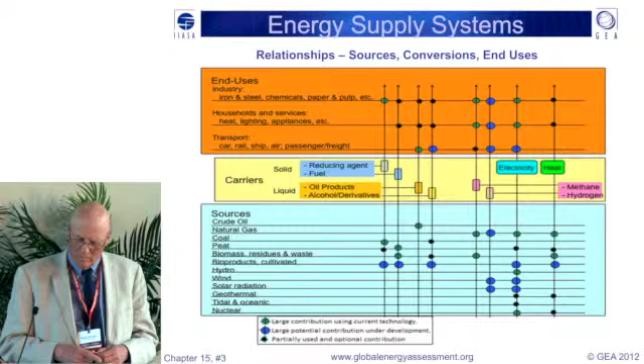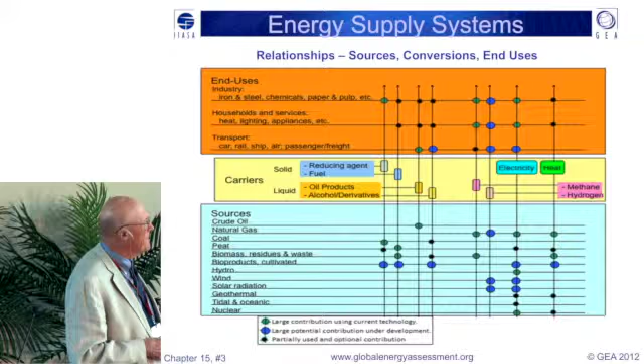Energy supply systems really are very complex, and this is an oversimplification. I don't expect that you will be able to read anything, let alone everything. But basically, we go from various energy sources down here up through energy carriers. In some cases, the source is the carrier, for example natural gas, and up to a whole bunch of end uses. In the report, we've tried to indicate which ones are important and becoming more important, and which ones are not important now but might become very important in the future.

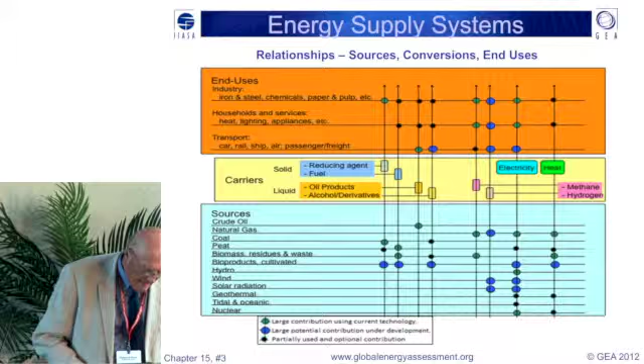Now, now I'm going to be timed. There we go.

So in terms of future energy systems, the report talks about providing, and we heard a lot this morning about providing affordable energy services to everyone by 2050. Naki had several slides that said 2030, and you forced me, Naki, to go back and look, and I did find 2050 in the report, but it doesn't matter. At some point in the next 20 or 30 years, 40 years, the goal is to provide energy services to all.

Now, I put the next bullet down because that tends to lead many people—I think we're all past that—to gravitate toward rural areas where people don't have access to energy. But I put down cities are the key, because if you think about it, so many things are happening in urban areas, and the affordable part applies to urban areas as well as rural areas. The point I want to make, or we want to make in the chapter, is that anything that's done to deal with the problems in cities will benefit people in rural areas.

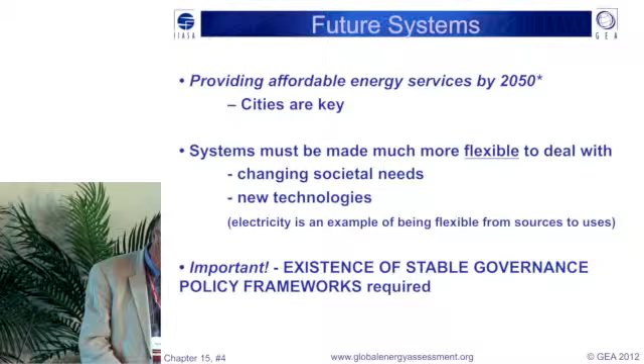Arnulf, a little bit later, is going to talk about urban energy systems, so I will not go into it any more deeply other than to leave you with a couple of numbers that tend to get lost. Over the next 20 or so years, we can expect in the world to see something like 10 cities of 7 million people, new ones, every year. Usually when you read this or when I talk to people, their eyes glaze over because they begin to think of that many cities over the 20-year time frame, but it's every year.

So cities are, I want to amplify on what Arnulf will say, cities are terribly important, particularly in terms of energy systems. That's what I want to talk about here, because that's where we can probably do the most good, and the rural areas will benefit from what gets done in those areas. And not to be overlooked, if you're an energy industry, the markets are tremendous in the urban areas. They're not quite so robust in the rural areas. So my point is we need to think in terms of cities.

Also, the report makes a point that the energy systems that we're moving into need to be made much more flexible. And there are two main drivers of that. One is the kinds of technologies that are coming along, to be able to adapt to those technologies. And we're not sure which are the winners and which are the losers, but flexibility is key to doing that. And also rapidly changing social needs. And electricity is a good example. Kurt talked about it this morning. I'll talk about it in a minute. It's an example of being flexible.

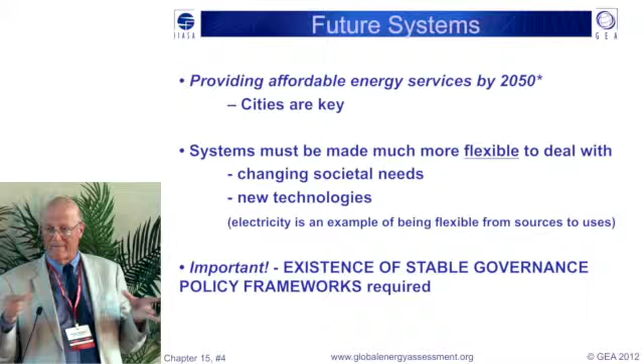The last bullet was touched on again this morning, and we'll touch on it more later, and that is, in order to implement the systems of the future, and this is amplified in the report, the existence of stable governance policy frameworks is required, and that tends to very often get overlooked. But the point I think we need to make and continue to make is that technologists and financial institutions and policymakers need to work together and get into a stable situation. We had a brief conversation at lunch, and I'm sure you'll hear more in this session.

There are some critical questions that come out. There are lots of questions in the chapters that I'm talking about, but some critical questions are, will the future competition be between energy sources? If we go back 100 years, that's more or less where we started, but things are obviously changing. Will it be between end uses? Will it be between sources and end uses, or integrated systems? We have some ideas, or it could be some combination of all of the above, but we need to keep that question in mind.

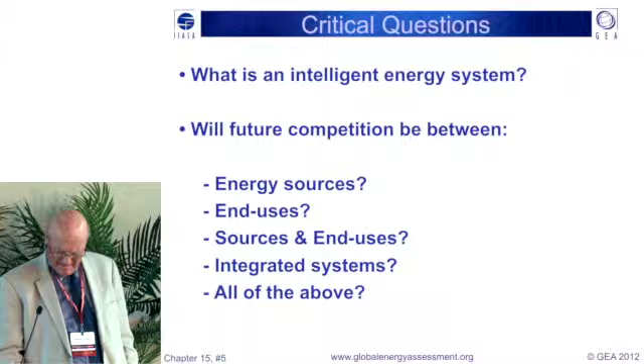And then Kurt talked a bit about intelligent energy systems this morning. We'll talk about some more, but I think we need to keep asking the question, what does an intelligent system look like? We don't think it's cast in concrete. In its overall outline it is, but in detail it's not that clear. And will we know one when we see one? So let me begin with electricity.

As we've said, it has the ability to transform a broad array of resources into useful goods and services. A statistic that's in the report, which I find interesting, and I think you will too, is that if we could double the amount of electricity that's projected in 2050 in a business as usual scenario, given what we know about how electricity interacts in the world today, we'd get a 2/3 reduction in carbon emissions. Some of that is efficiency. A fair bit of it is. And we'd get a 50% increase, roughly, in economic output.

Kurt, by the way, who just came back, was one of the, if you didn't notice, he was one of the authors of Chapter 15.

So the goal is to get everyone up to at least where advanced economies are today, roughly 2,000 kilowatt hours per year per capita. The U.S. is about 6 times that, a little more than 6 times that, if you're looking at comparisons. And then to repeat what I already said about cities, in 2050 it's expected that 2/3 of the population of the world will be in cities, in urban areas.

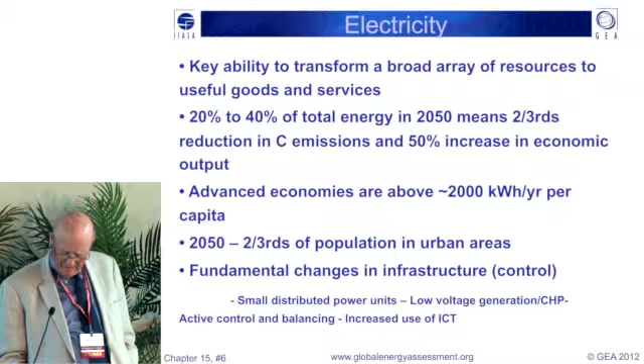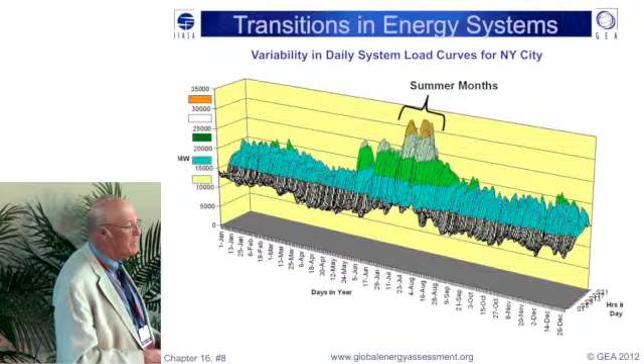This just shows you why you need storage. This is New York in the summer months, where the peak power goes really up and causes problems.

I want to talk about, we could talk about a number of different systems. We could talk about a natural gas grid, for example, but we talk about all of those in the chapter. Here, I just wanted to mention hydrogen. It also, like electricity, has the potential, has the flexibility, and the societal advantages, and the technology is there, and it's used in a whole bunch of different areas today, but a key area is fuel cells.

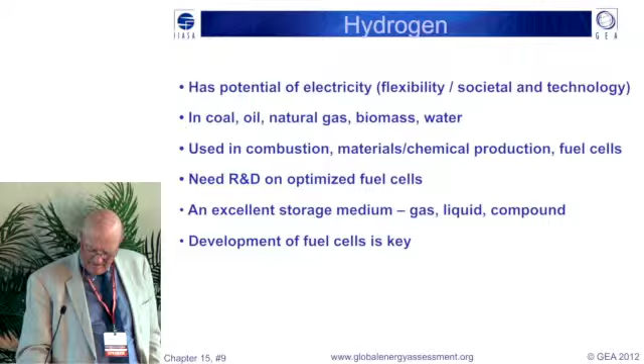And if there's an area that needs a great deal of research now, it's fuel cells. I like to think of a fuel cell as an electrolyzer run backwards, and that fits into the grid concept: you can take water and make hydrogen, or you can use hydrogen to make water and get energy out. Put energy in to make hydrogen, get energy back out to use the hydrogen. It's also an excellent storage medium. So you can be using electricity, and that's one of the ways you could potentially store it. So the development of fuel cells is key.

This just shows you, not to get into Wim's talk, but all the different ways you can make hydrogen from renewable energy.

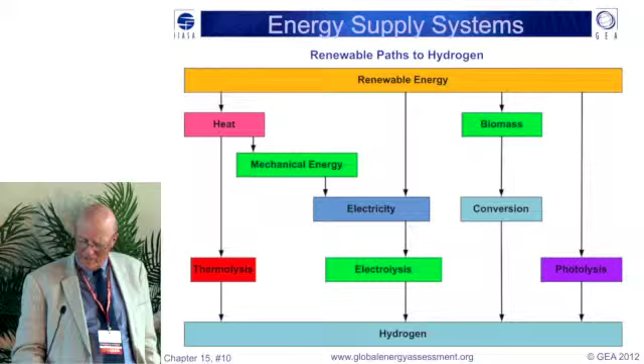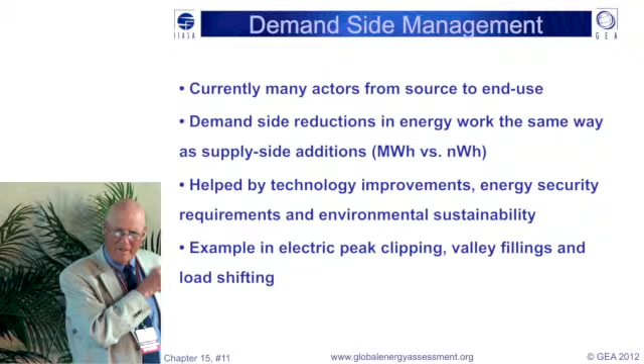I'm going to skip over demand-side management in the interest of time, but there's a great deal of that in the report, and it has a tremendous potential to make whatever grid you're using much more efficient.

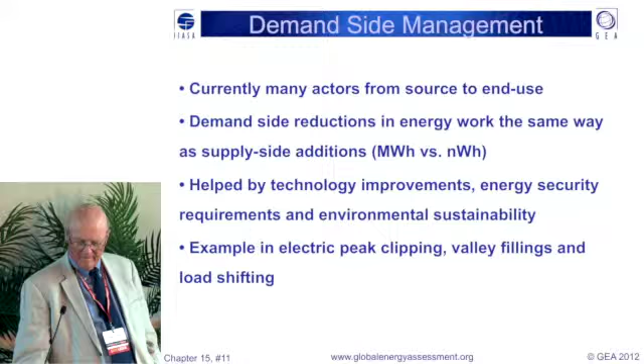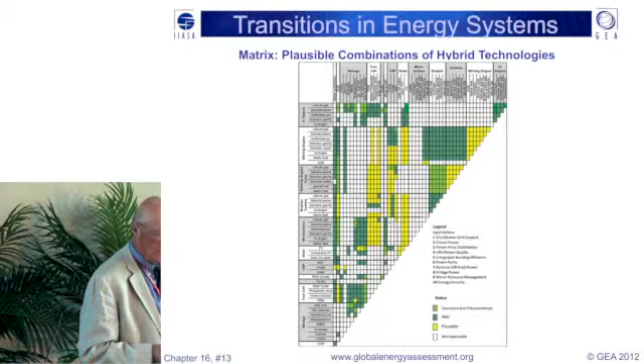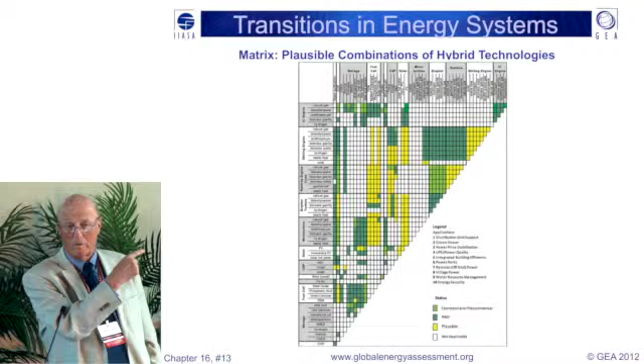This, you have to go to the report. I don't expect you to be able to see this, but this shows the potential combinations, the real and potential combinations of various technologies, too many to even read on here, with different colors indicating where they are in their current development. So I put this in here to give you an indication of the kinds of things that are going to change our world in the next 10, 20, 30 years.

So what's the future? The technologies are available now, but they need more sustained investment in supporting policies. And where are we headed?

To answer the question of where are we headed, I think we need to look at innovations and experimentations, the kinds of things that are going on. It's in the chapter: things like hybrid systems, looking at sources and production, combined heat and power, much more of consumers being producers, simultaneous delivery of energy and non-energy services. You'll see much more of that. We're already seeing a fair bit of it.

Storage—I think we'll see things in storage, distributed generation. I want to mention ESCOs in India. That's an energy services company that basically provides things, and there are examples today in India that seem to be working well.

So our bottom line is: expect great changes, expect rapid changes, expect winners, expect losers, and expect surprises. So, thank you.